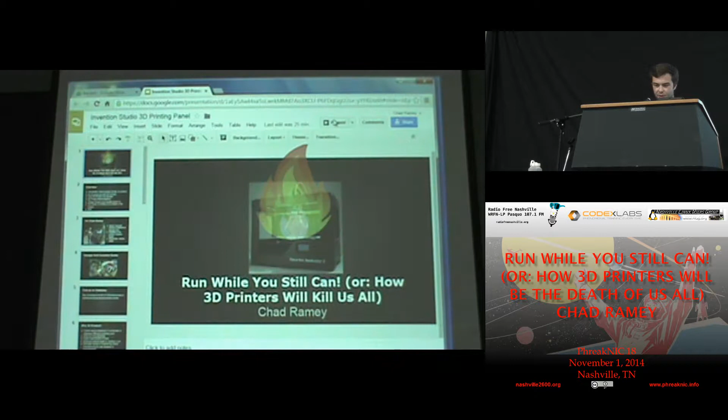So tonight I kind of just want to share my personal experiences with 3D printers, which are not all incredibly positive, but I have had some good times with 3D printers. I hope that this talk can be kind of an in-between between very pessimistic and very optimistic. However, personally, I believe the media has been entirely a little too optimistic.

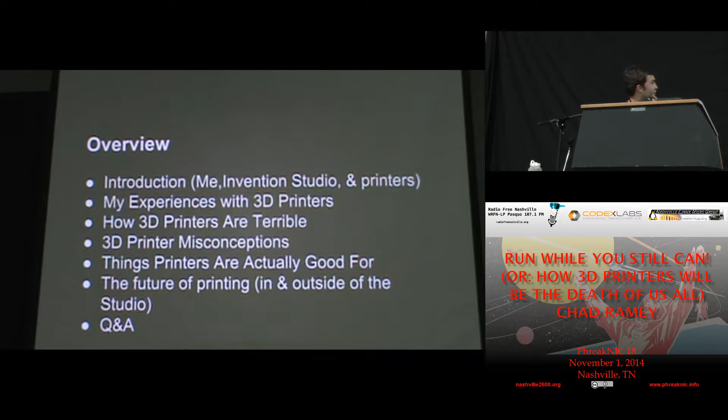It's my goal to maybe shed some light on the limitations and realism around 3D printers, but we'll see how we do. So basically, I'm going to talk a little bit about myself, the Invention Studio, which is a really neat place that I'm really involved with, my experience with 3D printers, how I think they're terrible, some common misconceptions about 3D printers, things that they're actually good at, and where I think 3D printing is heading in the future, possibly a future where 3D printers have killed us all off and become sentient and started their own society. Then we'll have some time for Q&A, hopefully. But feel free to ask questions during the talk.

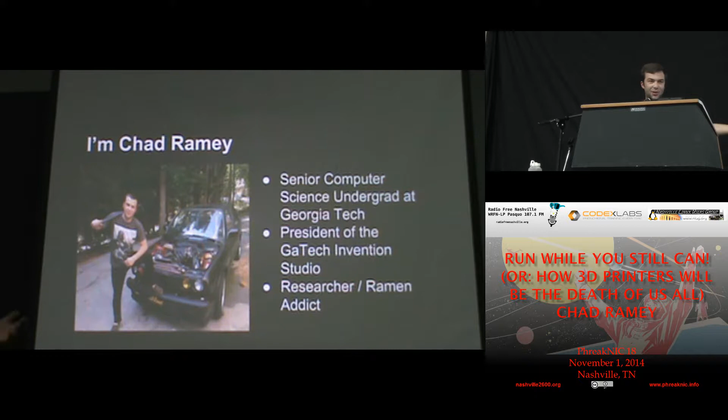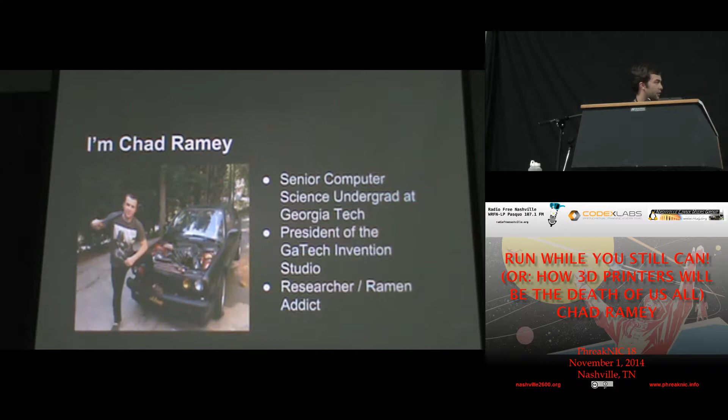So I'm Chad. I like building things. Sometimes that involves nuclear reactors, sometimes that involves 3D printed things, sometimes that involves race cars. I like to have a good time. I'm a senior in computer science at the Georgia Institute of Technology, currently the president of the Georgia Tech Invention Studio. And in what little free time I have, I also do some research and eat a bunch of ramen.

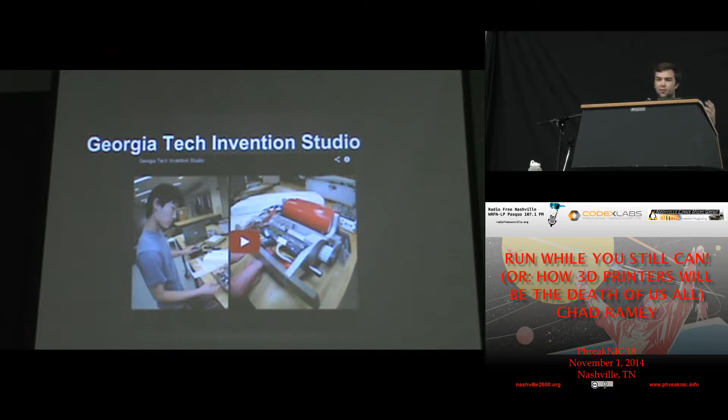This is basically a short overview video about the Invention Studio that does a really good job of showing what we're all about. In a general sense, we are a by-student, for-student machine shop and hackerspace at Georgia Tech, which is really nice because we get Georgia Tech money to do normal hackerspace things. So we have lots of really awesome machines and many, many 3D printers. That's where I've gotten a lot of my experience from. But to give you a general idea of who we are and what we're all about, I'm just going to go ahead and show you guys this.

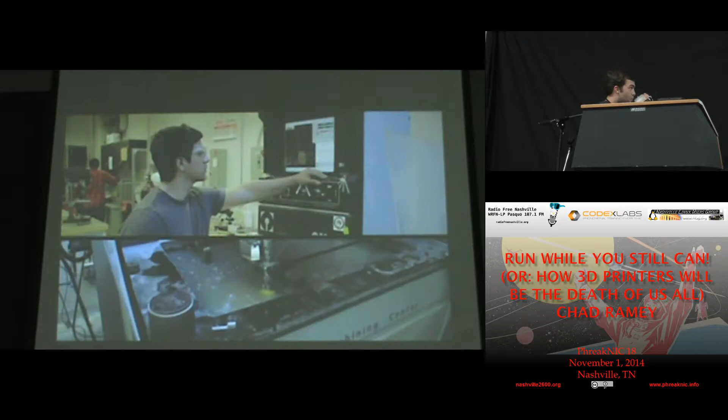The Invention Studio is this magical place where they have basically every tool that you could possibly want to build something, and most of them are tools that no person could ever possibly afford. What we're doing here is actually completely new, not just at Georgia Tech, but everywhere. We're all teaching ourselves and teaching each other and creating a collaborative environment where knowledge flows really easily. It's helping reshape and mold the future of education, really into much more of this maker, creator, hacker culture.

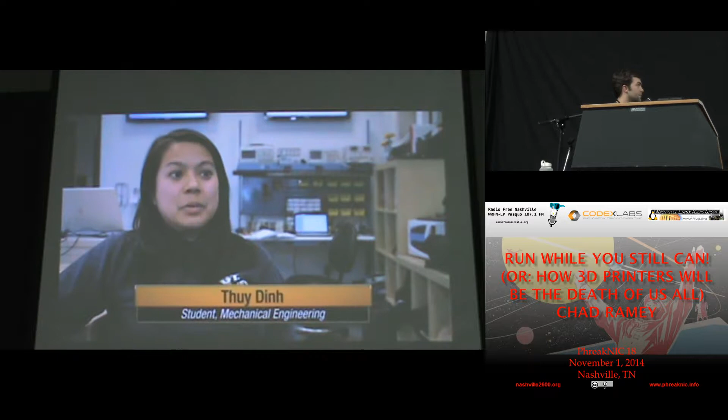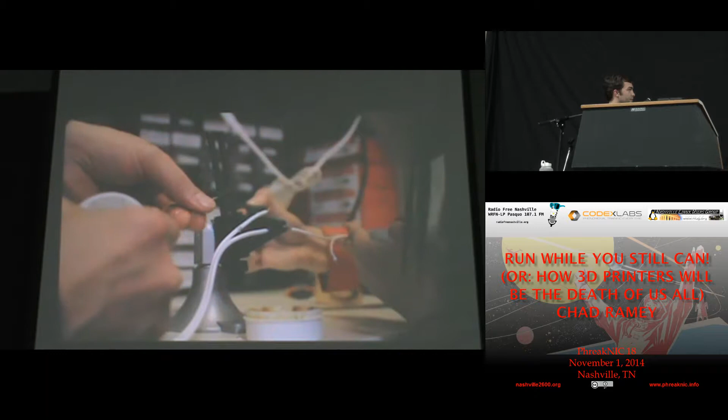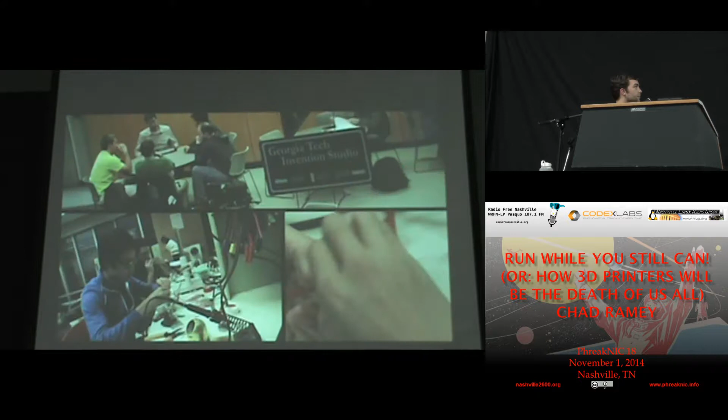We went from having 10 students in one room to having 5 rooms, and we're up to like 60 students right now running the shop. We keep the doors open, we keep the machines running. We're sure that all of the safety protocols are met. On a monthly basis, we have around 500 different people coming in from across 9 or so different majors. When you really get mechanical engineers and industrial designers and material science majors and biomedical engineers all coming together and sitting down at a table, you get completely different ideas.

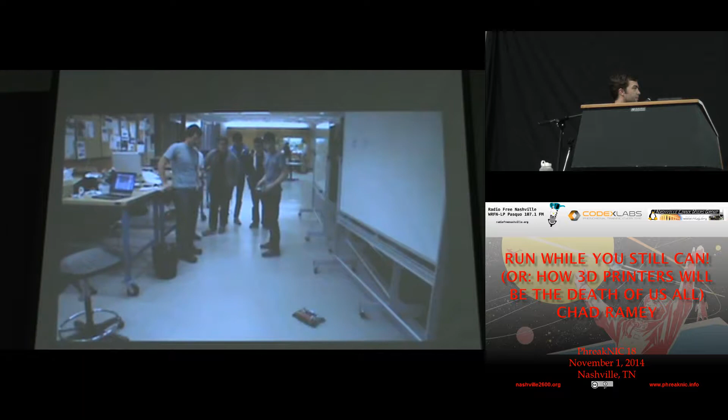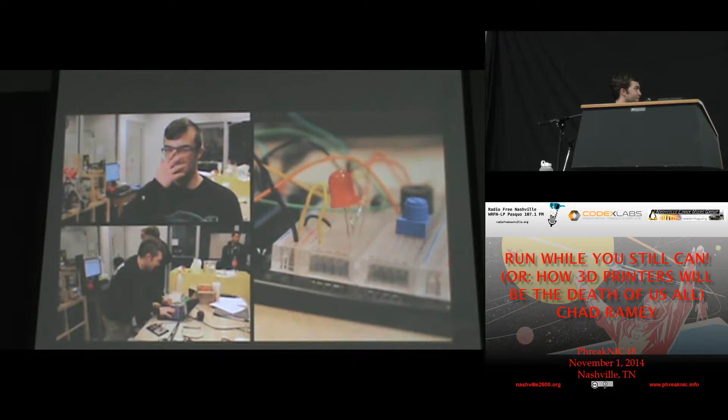There are some really cool people here doing some really crazy things. I was cutting out the lid and base for a Faraday cage for a particle accelerator. I'm working on improving my BattleBot. We've been playing around with making some jet turbine wheels. I'm working on my steel string acoustic guitar. I'm working on an experimental model aircraft. I'm working on a 50-kilogram satellite.

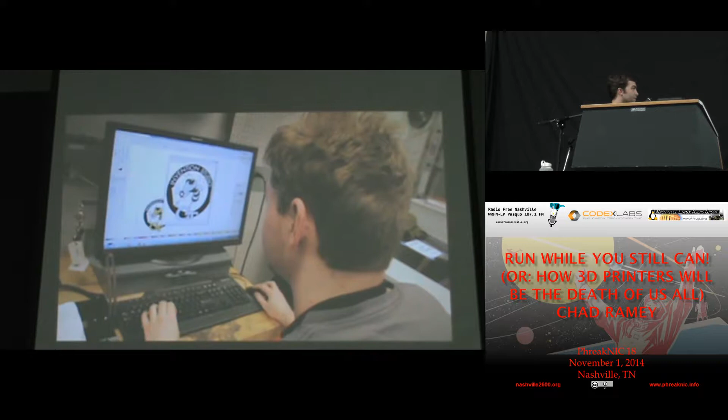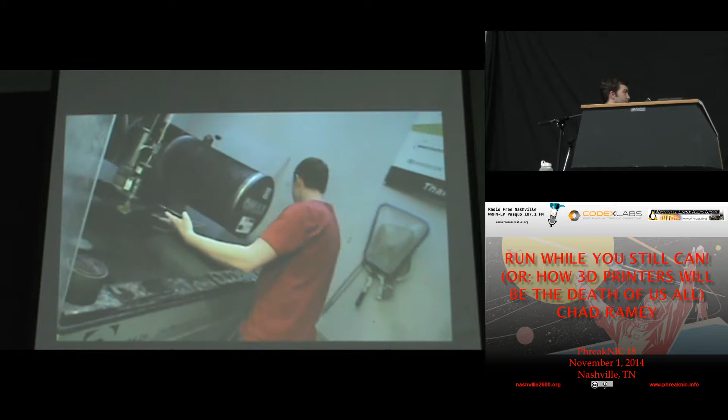In order to keep the Invention Studio open and available to all students, it takes lots and lots of funding. That money comes from our generous corporate sponsors, as well as the tech fee that we get annually. The great need is to have a building, an entire building dedicated to the idea of interdisciplinary design and bringing the maker movement back into engineering and engineering schools.

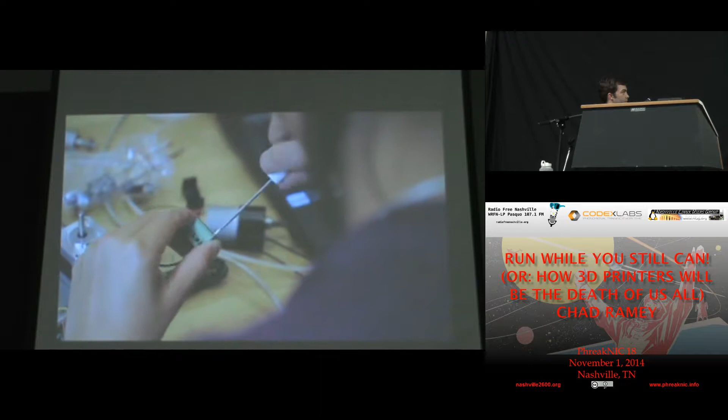So this video was made about a year ago. Since then we've gotten another room, we have about 80 student volunteers now and about 1,500 students and researchers that come through on a monthly basis. And again, it's all entirely student run.

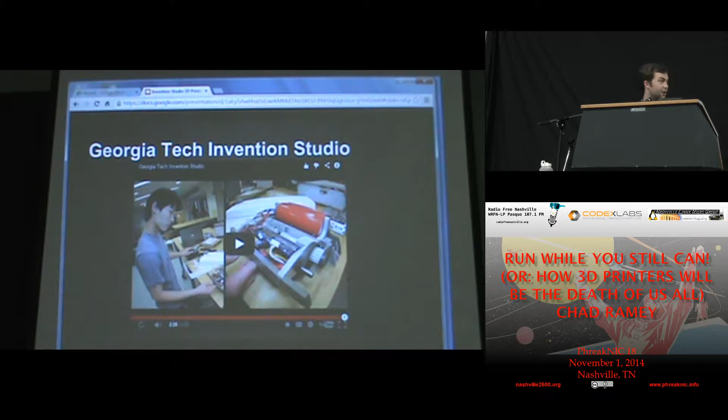Which is really neat because you get to come into the Invention Studio and work on something with another student helping you out, not necessarily some machinist who's been around forever and is going to look over your shoulder the entire time telling you everything you're doing wrong. We're sort of just there to yell at you and tell you to use clamps, or that, hey, don't do that or you're going to cut your finger off—basic things—and then everything else is up to you as a student. You basically have free reign over whatever you want to use. Sorry, I can't figure out how to get this to go back full screen, so we'll just do this.

The other thing that goes along with us being student-run is that we have students fix and maintain all of our machines. I took responsibility last year of maintaining all of our 3D printers, which basically resulted in me spending about 40 hours a week in our back room, which is this basement room with no windows, no natural sunlight. It's like the 3D printer cave, just surrounded by broken 3D printers every day, having to work on them all the time.

So a lot of my views expressed in this presentation are a result of that year of living among the 3D printers and working on them every day. But basically, we have 3D printers in the studio because we think they are cool, developing technology, emphasis on developing technology. They've come a really long way in the past 5 years or so, and I think they still have a really long way to go. Progression is fairly quick in the industry because it's fairly big right now, but we like to have 3D printers as a rapid prototyping technology, and emphasis should be placed on those words.

These are the takeaways of the entire presentation as far as what I think people should understand about 3D printers: they are a rapid prototyping technology, very good for prototyping things, not necessarily as much for finished products, and we can talk about that in more detail throughout the presentation.

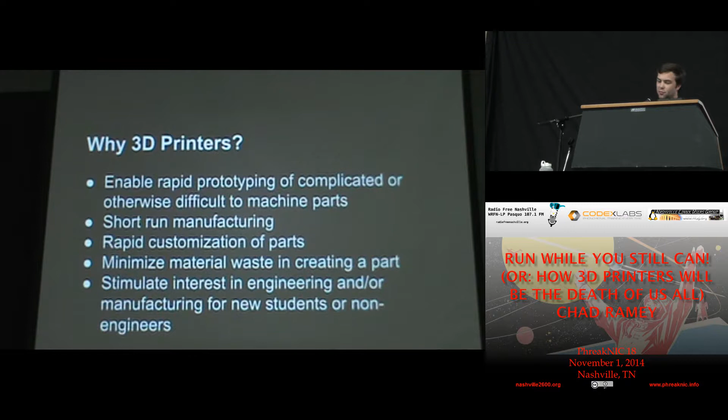It's certainly awesome to see a bunch of electrical engineers, biomedical engineering students, or liberal arts people come out of Georgia Tech with not only a degree in whatever their field is, but also a bunch of machining experience, which allows them to go into industry with some manufacturing knowledge as well.

As far as common materials, we deal mostly with FDM-style 3D printing, which I should probably talk about first. There are several different flavors of 3D printing. FDM is called fused deposition modeling, and I had the chance to meet the guy who initially made the patent for FDM and asked him how he came up with this idea.

He said his daughter had a plastic frog toy that broke one night, and he just wanted to make another one in-house, so he grabbed a hot glue gun and made layers in the corresponding shape of the frog until he had a bunch of layers piled up that resembled the frog. He realized he could take this hot glue gun and strap it to a plotter, then put a z-axis on the plotter so it could move up and down, and that was his first FDM-style printer.

Now he owns Stratasys Corporation, which is probably one of the largest industrial-grade 3D printing companies in the world, which is pretty neat. But FDM also happens to be the basis for the cheapest consumer-grade printers.

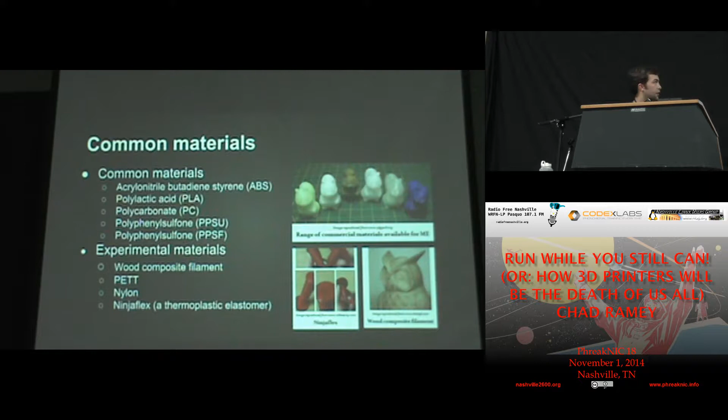They usually use, as this slide shows, ABS or polylactic acid (PLA), which are two thermoplastics fairly common in industry. For instance, ABS is the plastic that Legos are made out of, so it's everywhere and pretty easy to work with. They have different structural qualities - for instance, ABS tends to shrink as it cools down, while PLA is a little easier to deal with, and you don't have to have a heated build platform.

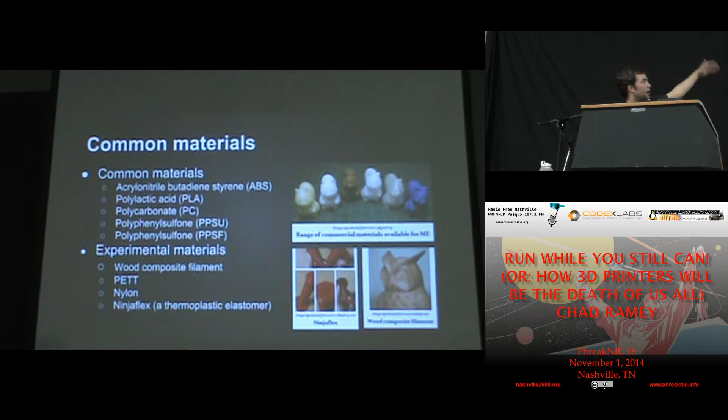We've played around with all of these different materials. We have some neat filaments now that are like a wood pulp composite put together with an epoxy that you can melt and have a 3D printed wooden part, which is pretty neat. Or Ninjaflex—we've had a couple of students print shoes out of Ninjaflex, which end up not lasting very long, but it's cool to see a part made before you in real time that you can put on your foot and walk across campus in.

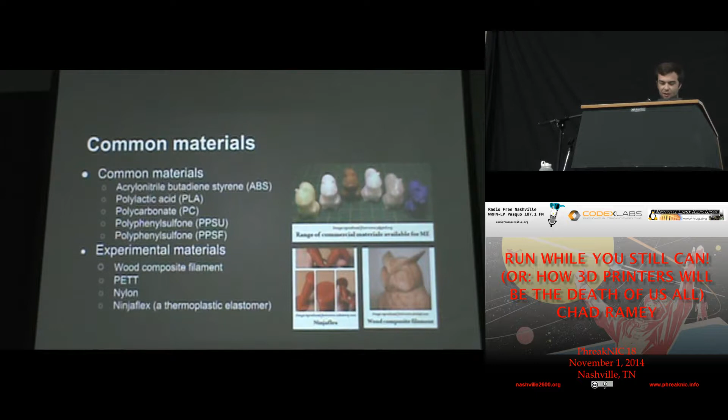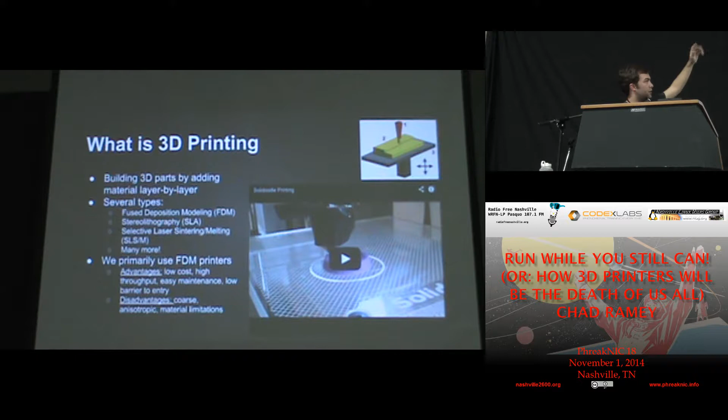So that's pretty neat. There's also stereolithography, or SLA, and selective laser sintering, SLS, or SLM for selective laser melting. These SLA and SLS machines are usually much more expensive. We have a couple of them. For instance, we just got a Form 1 printer, which has a photopolymer resin with a light on the bottom—you shine a light onto the resin, and where the light hits, it hardens. That allows you to make a much more detailed part than FDM, which is basically like taking a hot glue gun and laying down layers until you have an entire part.

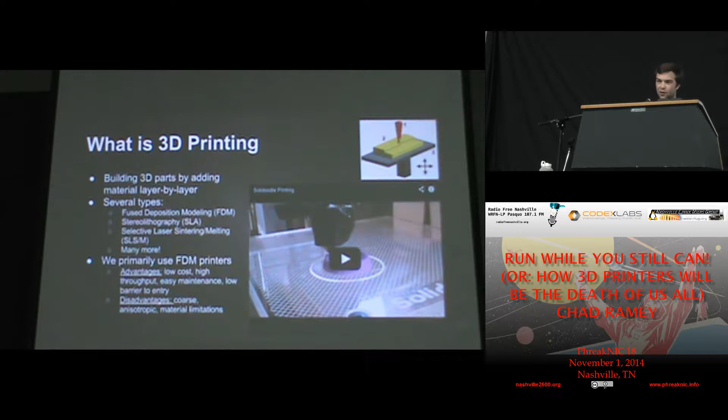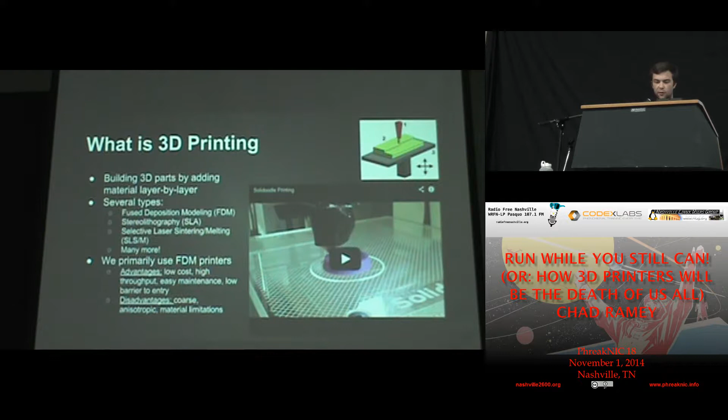The interesting disadvantage with this, though, is what we call anisotropic structural qualities of the part—meaning that when laying down a part layer by layer, you don't necessarily have uniform fusion from layer to layer. So most 3D printed parts are not very structurally sound. You wouldn't want to make a steering linkage, or anything your life depends on, or that will take a lot of mass impact, because some areas of the part will be better bonded than others. Sometimes that results in a part that's strong in one area and not so strong in another. So there are many design considerations to take into account when 3D printing, and that's just one of them that's particularly limiting in FDM-style manufacturing.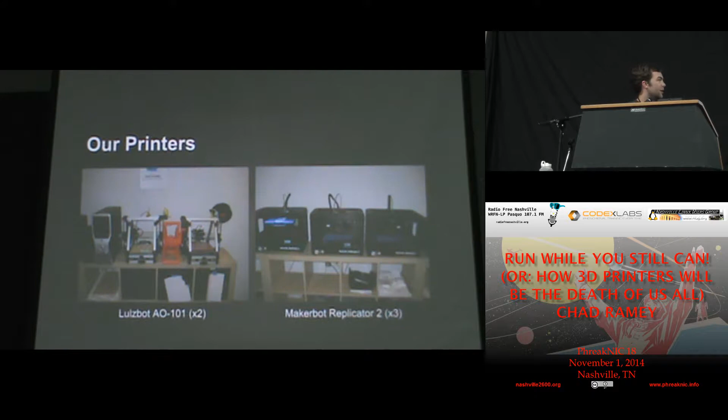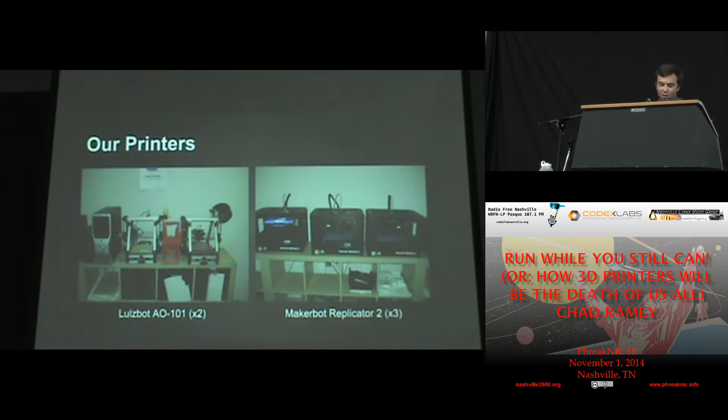Just to give you a rundown of our fleet and the printers I've had experience with—we have a whole lot: 2 Lulzbot AO-101s, 3 Replicator 2s, one of which is in the other room. It did a great job demonstrating my point about why 3D printers are aggravating last night—a group of about 6 of us stood around the printer for an hour trying to get it to print, and just continually watched it fail epically.

We also have a bunch of Up Minis, which are really nice. Compare them to something like a Stratasys Dimension—they're all nice and closed off, like something you could see sitting beside your computer at home next to your PC tower. It's nice because it's all in one box and closed off, meaning the entire build volume is heated. Like I mentioned earlier, ABS shrinks somewhere between 3 and 6% as it cools down, so you have to close the entire area off. Otherwise you're subject to air currents that flow through the build volume while printing and shrink certain parts before others, resulting in malformed parts, which is kind of hilarious sometimes.

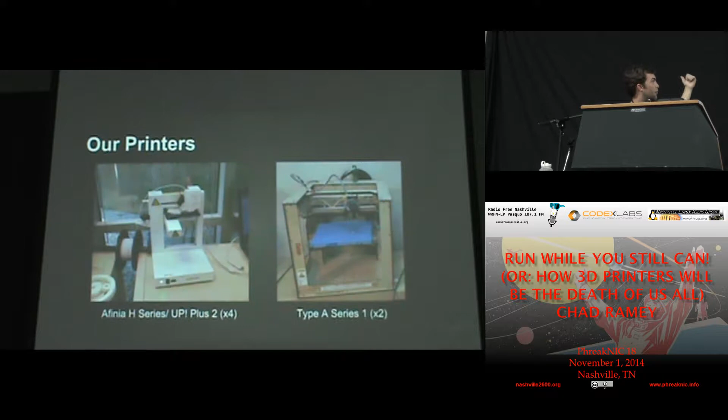The Lulzbot TAZs are also ABS printers with heated build platforms, but they don't have an enclosure, so they're often subject to lots of problems. We also have a bunch of H-Series and Up Plus 2s, like the older brothers of the Up Minis—now all in heated enclosures, which is really nice. We have a couple of Type A Series 1s, which are absolutely huge, and print PLA. To give you an appreciation for how quickly things change in the Invention Studio—we gave a modified version of this talk at DragonCon this year, and at that time our Replicator 2s, Series 1 printers, TAZs, and AO101s were all alive. They've all been put out of their misery now, taken apart and transformed into more useful things.

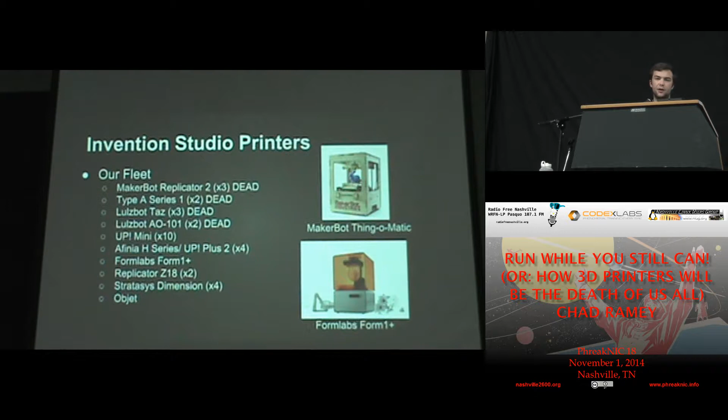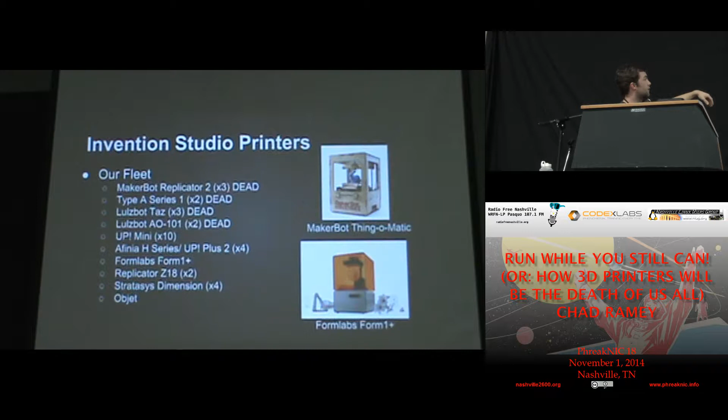At the same time, we are starting to grow really rapidly in the number of 3D printers we have. We have about 30 now, all in one big room, so you can walk in and use whatever you want. That includes mostly FDM printers—the Up Minis, the Afinias, the Replicator Z18s, and the Dimensions are all FDMs—and then the Formlabs Form1+ and the Objet are SLA printers, which do really high resolution stuff out of photopolymer resin.

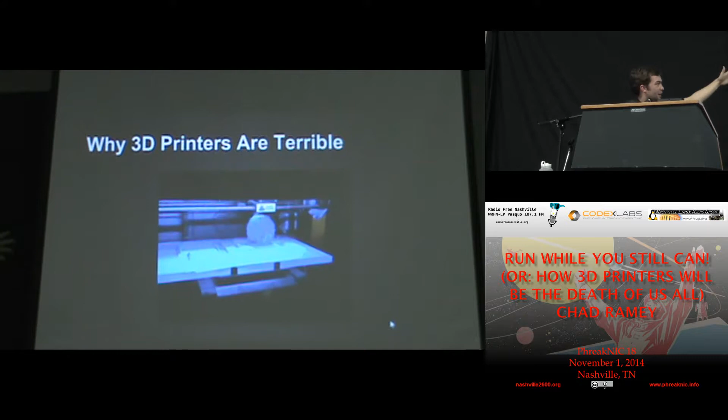So as far as why 3D printers are terrible, this is one of my favorite YouTube videos, and it encapsulates just about everything that's frustrating with 3D printers. This printer is supposed to be printing a Raspberry Pi case, which is basically some simple rectangles, and has instead decided to make this ball of just wasted hopes and dreams and PLA filament.

And I was talking to Alan Fay earlier from Freeside, Atlanta. They're kind of down the street from Georgia Tech, and they have a couple of 3D printers as well. Really, the thing with 3D printers is you have so many variables to take into account with the operation of this machine.

So you have all of the linear motion components - steppers, linear slides, bearings, belts, and stepper motors. Then you have all of the electronics, the wiring harnesses that go to the steppers from the controllers. You have the controllers themselves, all of the motor controllers that can blow up. You have the motherboard, which is basically a fancy Arduino, which is not really meant for production products, in my opinion. And then you also have a hot end.

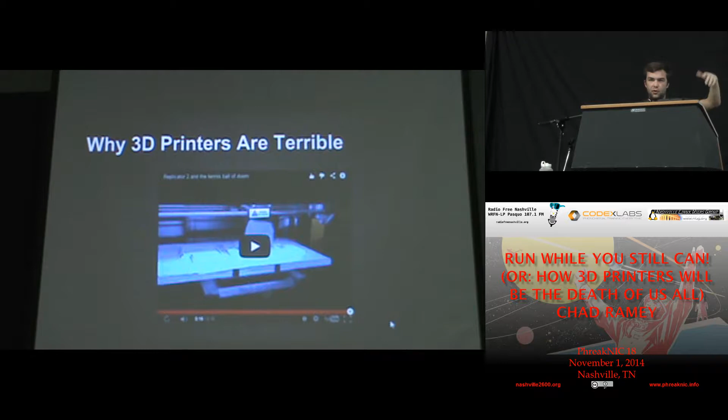It's sort of an evolved hot glue gun, which you're pushing filament through at like 80 millimeters a minute, and at really hot temperatures. PLA prints at 230 degrees Celsius, and this temperature control is done through a PID loop on the Arduino that could have been engineered by someone who hasn't studied systems control or anything like that.

So it's subject to temperature fluctuations, and basically at the end of the day you get a machine that is relying on luck to work properly, because you have so many things that are subject to failure, designed not necessarily by engineers, and all have to work together perfectly well to get a 3D printed part at the end of the day. Anytime you get a new filament, or you're trying to push the limitations of the 3D printer, you're having to change settings, and one small change can vastly affect how the printer is operating as a whole, because as complex of a system as it is, it's hard to see what one change in one variable might make in the operation of the printer as a whole.

And you're like halfway through the part and it fails, and you've wasted half of a spool of PLA, or you forget to level the build platform. So there are all sorts of things that can go wrong.

And what I often tell people as well is that in the Invention Studio, it's not necessarily always the printers that are at fault - it's kind of that they're in the Invention Studio. And I think most hackerspaces will tell you this as well.

When you have an environment where you have a bunch of machines that are just open for anyone to walk in and use - we don't allow that with our CNC mills and water jets and things like that, because people can cut off their arms and die horrible deaths using those machines. 3D printers are kind of cute, and they're not going to kill you unless you're very, very creative with them. That would be kind of hilarious to see.

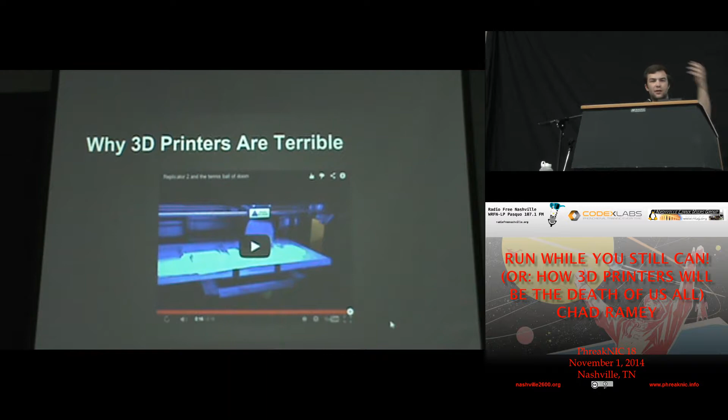But they do require a bit of experience and knowledge to think, okay, well, if I put this different filament in - if I put ABS filament in this printer that's meant for PLA, then it's going to clog up the nozzle, and then it takes 2 hours to unclog the nozzle by someone who has experience with a 3D printer, and can just cause a lot of aggravation.

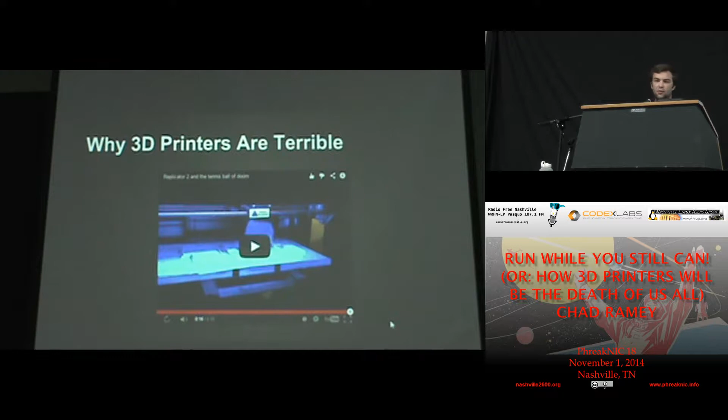Especially like when Alan said, sometimes something fails, and if you aren't an experienced user, not everyone can walk up to a 3D printer and say, oh, well, the build platform wasn't level, or the temperature wasn't up high enough. So without the proper expertise, these things can be a real fuss to make work properly.

Oh, I'm still on YouTube.

So just a couple of cool examples. There's actually been, and I'm kind of happy about this, a new form of glitch art that 3D printers have spawned. There are a bunch of websites now where you can just Google 'failed 3D prints,' and people will post like, okay, this is what this part was supposed to be, and instead I got this terrible ball, or this part here, if you remember back to the opening slide where I had the Replicator 2 on fire.

This was actually one of their sample parts that comes with the printer. You would think the printer would be able to properly print it out, but this one has made a mess of itself. It goes on the altar of the flying spaghetti monster. Yeah, it would be fitting there.

The same thing goes with this Replicator 1 on the right-hand side. I don't actually know what was printing on that one, but it's made a huge mess.

We also had the printer I have in the commons room called Ewok. It had an error where the wires on the x-axis stepper motor were not properly strain relieved. So when that wiring harness started to short out, the stepper motor would skip steps, which would result in maybe 5 or 10 layers of your part being stacked on top of itself like it should have been, and then it would start skipping steps, and you'd have a nice part and then diagonally printed the rest of the part off to one side, which is kind of hilarious to see as well.

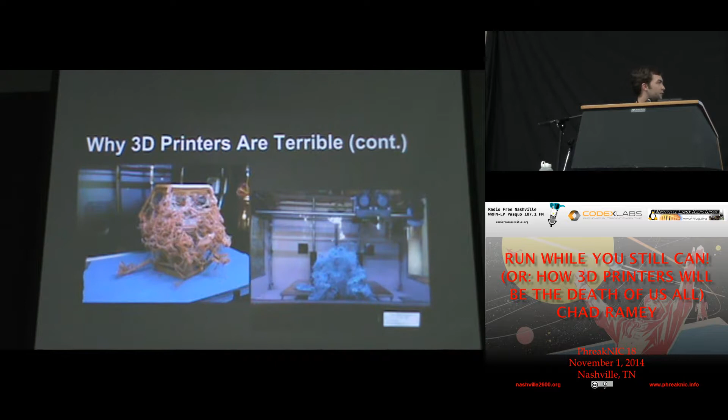I think it says a little bit about their engineering prowess to say that, well, they had this failure that should have been easily prevented by using proper wires and proper strain relief techniques, but at least not all of them failed at the same time, and we could repair them. The printer Ewok that I have in the other room, you can take a look at and see all the different parts that we've had to cut wiring harnesses and make our own, and build our own extruders and things like that. It's been a pretty interesting practical engineering exercise for us to repair all of those things, because we're basically learning as we go like everybody else is.

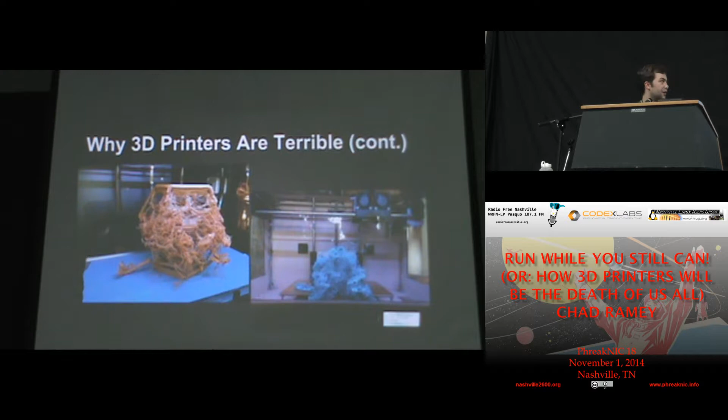So what I learned very quickly is that managing 30 3D printers is not as easy as it may sound. You think, oh well, they're fancy hot glue guns, what could go wrong? It's fairly simple - you're putting plastic into a heated hole, and then molten plastic is coming out, and it just moves around and piles the molten plastic on top of itself, and then you're all good.

So that's very difficult. And then you have to keep up with fleet capabilities. You never know from semester to semester what all the students are going to be working on. One semester you might have a lot of mechanical engineers who are content with, well, I just want to make a plate with some holes in it for a simple bracket. And then the next semester you might have a bunch of BMEs come in, biomedical engineers who want to make realistic models of neurons or something that has to be very high precision.

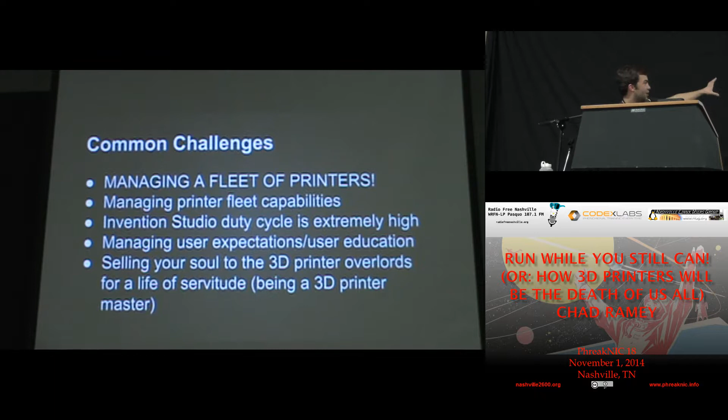And then educating your entire user base, who could just be random students walking in from day to day, on how to use 3D printers, and then living with having to sell your soul to 3D printer overlords for a life of servitude - that's what we call being a 3D printer master. You're voted in by the executive council that runs the Invention Studio, and then you become responsible for managing our 3D printers. For your lifetime of duty, which is usually about a year, all you get is crap from everyone else, because why aren't the 3D printers running all the time? Which is just an unrealistic expectation in and of itself.

So these are all things that I would imagine anyone who has a 3D printer will experience on a day-to-day basis.

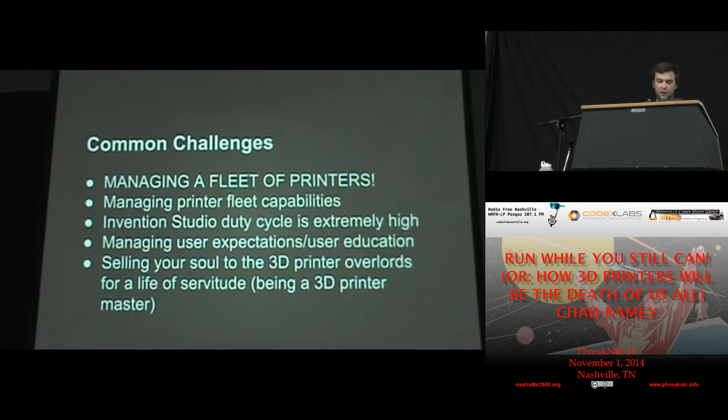Now on to the positive section of the talk.

I will point to Koenigsegg for a lot of really great examples of how 3D printers can be used for doing awesome stuff. Koenigsegg is a Swedish supercar manufacturer, and they make the best of the best cars, only about 6 to 10 of any particular model, which means they're doing very limited production runs, making 3D printing a viable solution for manufacturing really interesting, crazy parts.

For instance, this turbocharger has variable vanes on the inside of its housing, and it's printed using an SLS, selective laser sintering machine, out of titanium powder. This is sort of the state-of-the-art in metal 3D printing, and they've done several parts on their latest car, called the One:1, out of titanium.

There's actually a 3D printer company in Sweden that does all of this for them - the turbocharger housings, as well as the entire exhaust manifold, from the headers to the muffler and catalytic converter, all in one go on 3D printers. Since they're only doing 6 of them at a time, it's pretty feasible to actually do that.

But I always try to give examples to people. Doing a full run of Raspberry Pi cases on a 3D printer is not really viable, because you could do the same thing on an injection molder - CNC mill a mold out of aluminum or steel, and then just churn parts out all day long on an injection molder and never have any reliability issues. Whereas trying to do thousands and thousands of parts day in and day out on a 3D printer is just not going to work very well, from what we've found with experience.

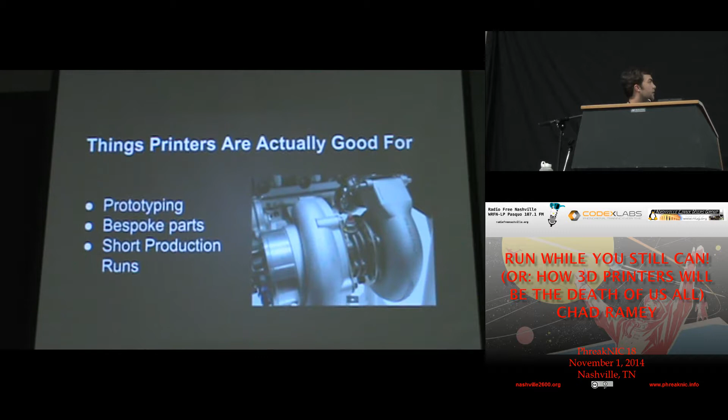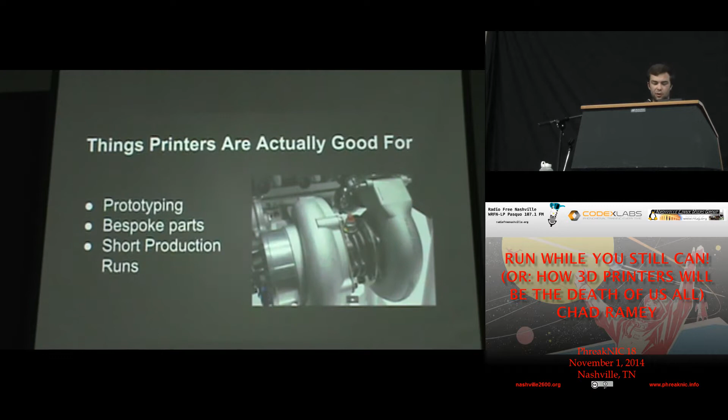Again, like I mentioned earlier, bespoke parts like cute bracelets or things like that. People have made wearable planters for small plants that you can wear around your neck, or jewelry and things like that. 3D printers are good with that, and short production runs are also good.

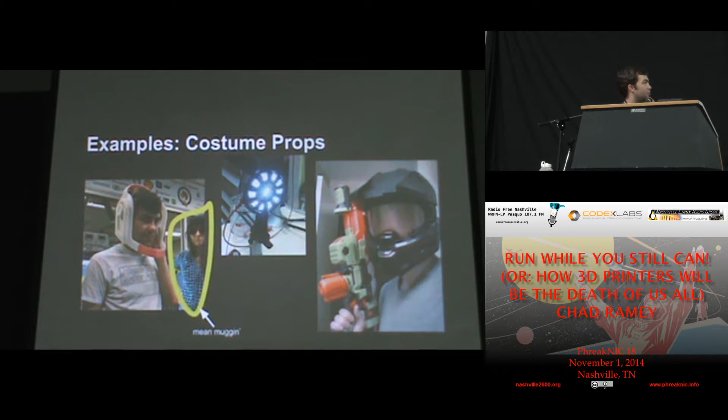Also an arc reactor from Iron Man, which is pretty neat.

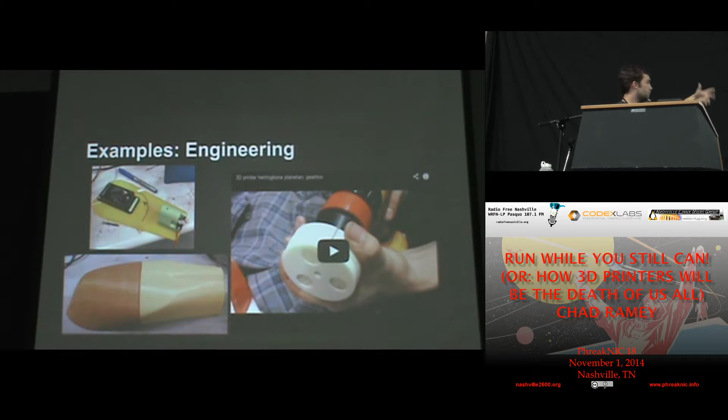And then our hydrodynamic case was designed to be vacuum formed, which is another really neat thing you can do with 3D printing - make vacuum forming molds.

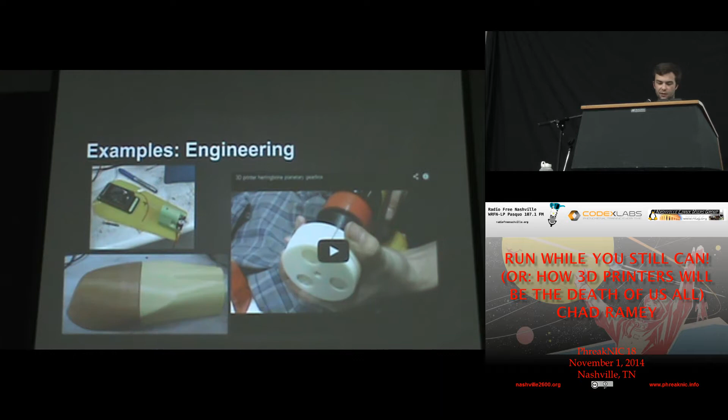So this was the hydrodynamic casing. We haven't tested it out yet, but it's going to Iceland in July, and we'll see how it does when it's put on the back of a whale.

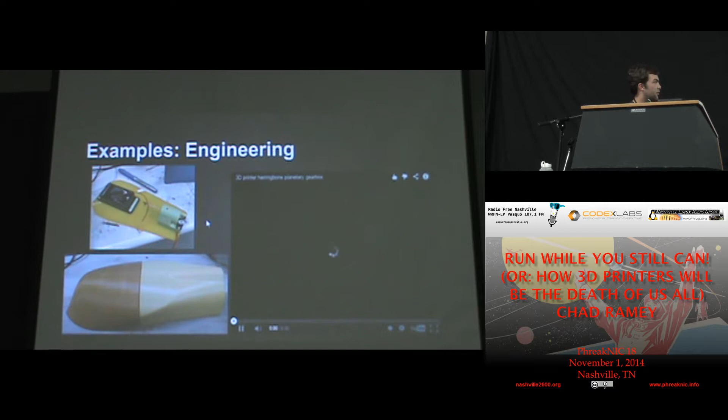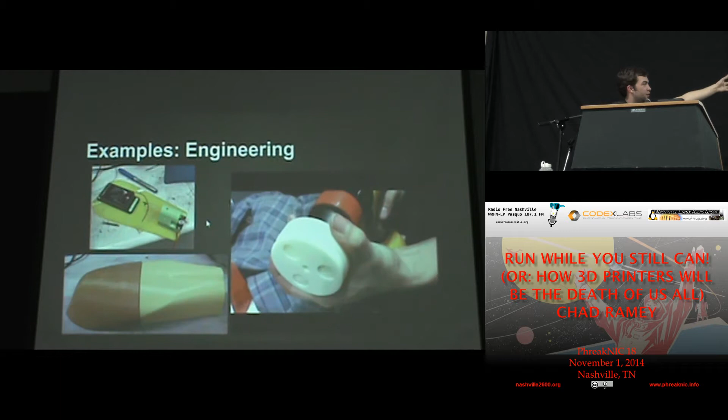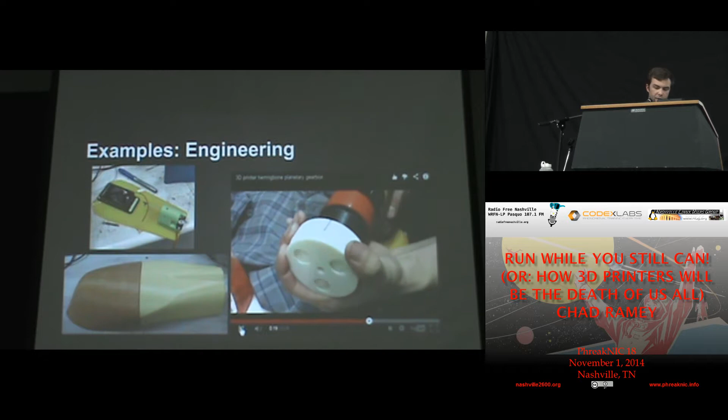This is also a pretty cool example of a gear set that was actually all 3D printed in one go. 3D printers can make things that are nested inside of each other, so the outside is actually turning. That's the reduced gear, connected by a bunch of gears on the inside to the drill that's turning the whole thing. Would I actually want to use this on anything that needed high reliability? Absolutely not. He burned his hand keeping it on the outside of the print while it was turning.

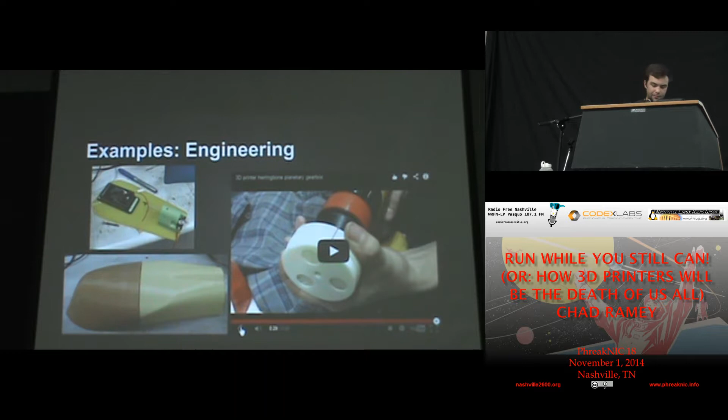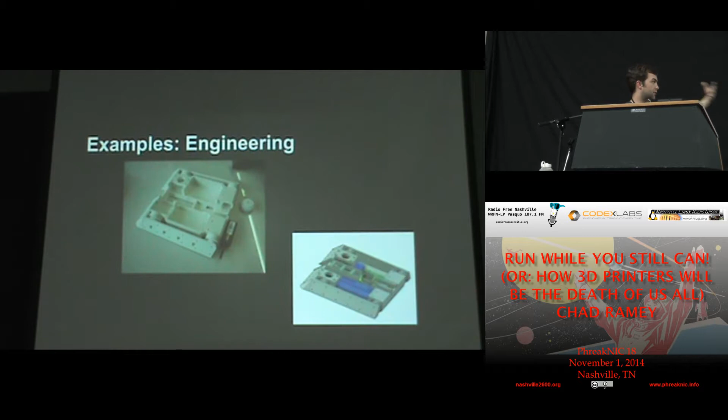All of the holes on the outside are made so you can put threaded inserts in them. You take a soldering iron, put a threaded insert on it, and then melt the threaded insert into the 3D printed part. Then you can screw hardened steel onto the outside, and it's pretty resilient, which is really neat. It saves a lot of time in manufacturing, because normally if you're going to do this on a CNC mill, it would take a couple of weeks to design the part in CAD, do all the CAM work, set up the machine, and buy all your tools. 3D printing ends up being a cheaper, quicker option.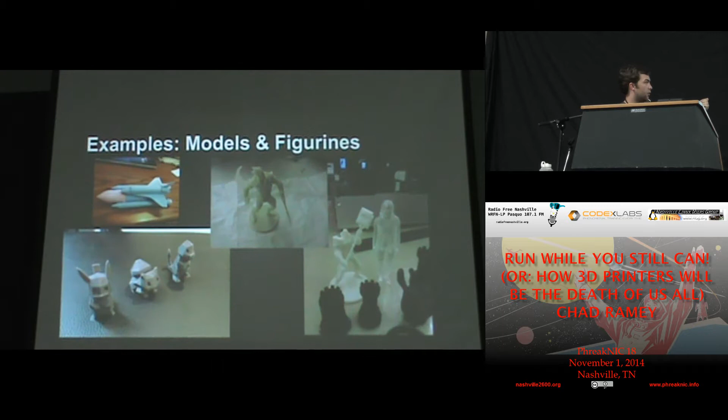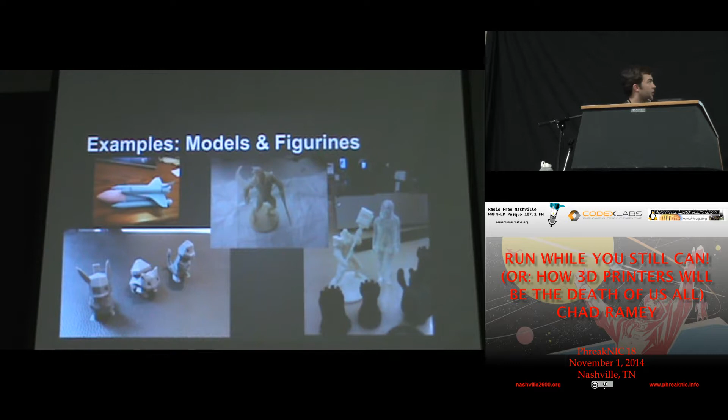With these you can kind of see the layers of the prints themselves. The little layers along the height of the part are where the separation of how it's been printed occurs, and then we'll bring it down and print more. That's an example of areas prone to separation, between those layers. Surface quality of 3D prints isn't always perfectly smooth after they've been printed, so you have to take that into account if you're making a prop or something you want to be perfectly smooth. It's not going to come out of the printer like that - you have to do a lot of finishing to get to that quality.

We also have a paper 3D printer, which is fairly neat. Going back to what I was saying about vacuum forming earlier, I've had a couple of experiments combining vacuum forming with 3D printing. You make a mold out of PLA, then put that mold into a vacuum forming machine - basically you take a sheet of plastic, put it in an oven, heat it up to about 230 degrees Celsius, drape it over your part, and you have a vacuum pump on the bottom that creates a seal between the plate and the plastic, sucking the plastic over your mold. Then you have a plastic piece you can replicate fairly easily - you just put a mold in, and you can have a piece in like 5 or 10 minutes, which is really neat. For instance, I'm making visors for my Halo helmet using this method.

With PLA though, PLA melts around 210 degrees Celsius, so when you're draping something over it at 230 degrees Celsius, you get lots of melting of your mold, which comes out to a part that's no good - it's warped in all sorts of weird ways.

However, our paper 3D printer, which has a standard inkjet printer in the bottom of its casing, takes a file, like an STL file, like you normally would with other 3D printers. It breaks it up into all the layers you need and prints out the colored patterns. This is something unique to the paper 3D printer as well - it can print in full color.

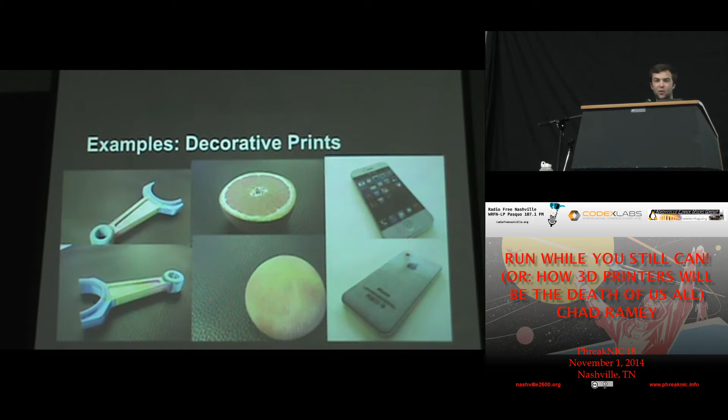I have printed turbines, basically the first half of a turbocharger, the impeller section that sucks air in and spits it out in high volume. We were looking at making a pump for a rocket motor that could move a high volume of liquid in a very small amount of time. So we were designing this to be strapped to a three-phase brushless DC motor from an RC airplane that can spin at a couple thousand RPM, spin that impeller up, suck kerosene through, and feed it into the rocket motor.

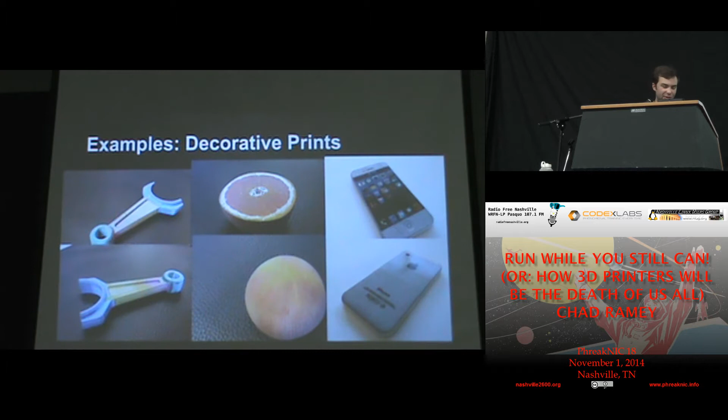Normally turbo pumps in rocket engines use a steam reaction to drive the turbine, but we thought we might get an RC-grade three-phase brushless motor to do the same thing. However, spinning a turbine wheel up to a couple thousand RPM that was 3D printed on a Replicator 2 is not a very good idea, and you definitely don't want to be close to it when it blows up in your face. Fortunately, we had enough sense to put it behind some acrylic, so we were all protected when it came apart. Any more questions?

I think I actually ended up finishing on time, which was good.

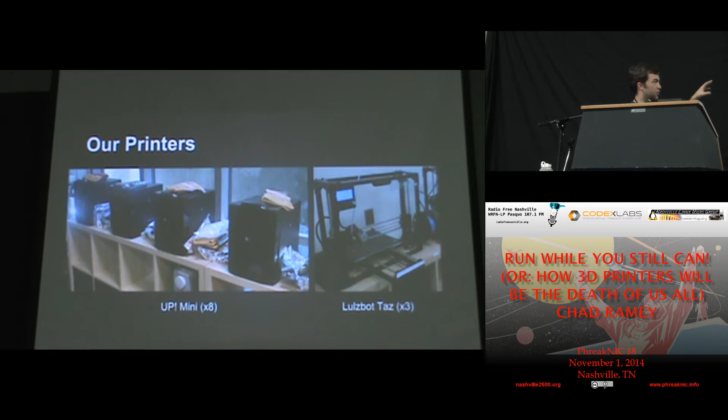What 3D printer would you recommend for most stability or longest lasting? I'd say the consensus around our community of friends—I was trained by a couple of guys now studying FDM technologies for a grad degree at MIT, and they have several other friends. We all got together for this presentation at DragonCon and decided what we think the best 3D printer is in the consumer market, and the Up Minis are our pick. You can buy these on Amazon for about $600 a pop, and if you buy 4 at once, they'll sell all 4 for $2,000, a substantial savings, which is what we did.

They print ABS, have a heated build volume, look really nice, and pretty much if a print gets through its first layer, you know the entire thing is going to finish. The Replicator 2s are notorious in my experience for getting 90% through a part and then quitting on you, which I'd much rather have a part fail on the first layer 3 times because the build platform isn't perfectly leveled, than get 90% through a part and have the extruder clog, wasting all that plastic and time.

So what is it about the Up Mini that makes it different, other than the fact that the replicator bots don't have a full casing, that makes the Up Mini better? Yeah, so on the inside of this, all of the frame and motion components are made out of metal, like nice high precision linear movement components. The MakerBot was sort of taken and said, how can we produce this in the cheapest and most marketable way?

And they made some sacrifices for making it look pretty and making it really cheap, which is still like 3 times more expensive than one of these machines. However, the internal structure for all of the motion components are all very soundly mounted to metal pieces, so you have very few flexing and warping on the components on the inside, which is really handy. The software is very easy to use, but it still gives you a little more control than the MakerBot software does. The temperature regulation is much better in these machines than it is on a MakerBot. Yeah, the list really goes on for a long time.

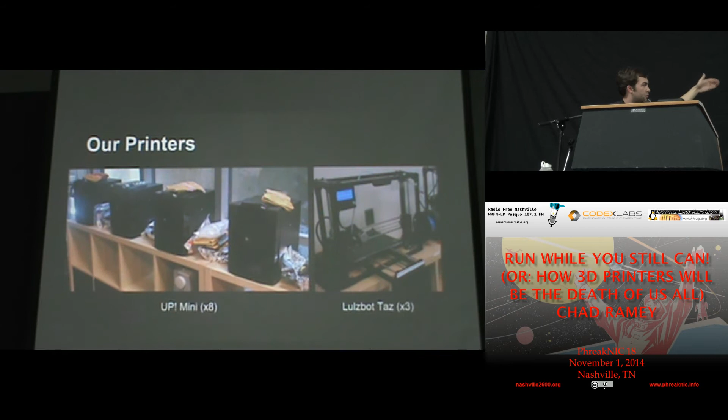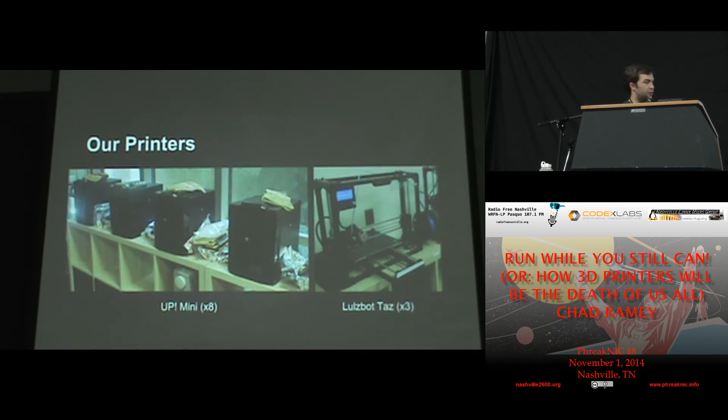What is the build volume? So this is a 4.5 inch by 4.5 inch by 5 inch build volume. Sometimes people will look at that and say, well, that's incredibly small, how am I going to do anything useful with that? And I usually share with people that I like to design parts that are sort of modular, that can be fastened together after you 3D print them.

So like, for instance, the Master Chief helmet was done in 28 different parts. And I learned very quickly if I wanted to do a large print on one of the Replicator 2s, if it failed 90% of the way through, you had to print the whole thing over again, versus if one small part fails, then you can just print the small part over and over again.

The other neat thing I can show you, I've got one of the Halo helmet pieces in my toolbox in the other room. I designed pin holes in the part that I can insert alignment pins, so steel rods that go in between the parts, which add a little more structural rigidity between them. So you can design with some cleverness if you do modular parts to have alignment pins or support beams on the inside of your part, which allow it to be a little better than if you were just making one huge 3D printed object.

Is there a 3D scanner you'd recommend? So I've actually found the Microsoft Kinect to be just about as good as anything else on the market. We have one of the MakerBot, what's it called, the digitizer, and it's just a load of rubbish. I tried to scan a Chick-fil-A cup with the digitizer, and it just looked like some sort of blob. So the resolution is very, very poor with digitizers.

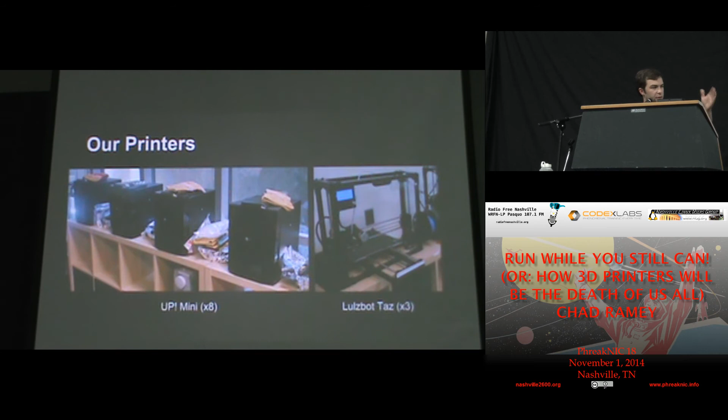We have a structured light scanner, which basically works by projecting an image of essentially black and white lines or squares, and then takes a picture with a really high resolution camera and measures the deflection of the image that it knows in software - the true image that it's projecting versus the warpings from the object being there. That works fairly well, but you have to reposition your object by hand every time, and if you get off by a few degrees in how you rotate it, sometimes the software isn't great at compensating for that.

There is the SDK for developing with Kinect that Microsoft released for Windows platforms, so it kind of sucks if you're on Linux or Mac, but if you're on Windows, you can download their development platform and basically hold the scanner and rotate it around an object, and the software will construct a mesh, a point cloud mesh that you can then convert into a 3D model.

So if you've already got an Xbox Kinect laying around, download the software development kit for it, play around with it. It's pretty great. I scanned the back half of my car and imported that shape into SolidWorks and used that to design a custom spoiler that I then made with a CNC router that we have in the studio. But it's very good for getting the quick dimensions of a shape. You can scan it and then not necessarily go straight from your scan to printing something, but with a little bit of post-processing and CAD software, you can have something that's really usable.